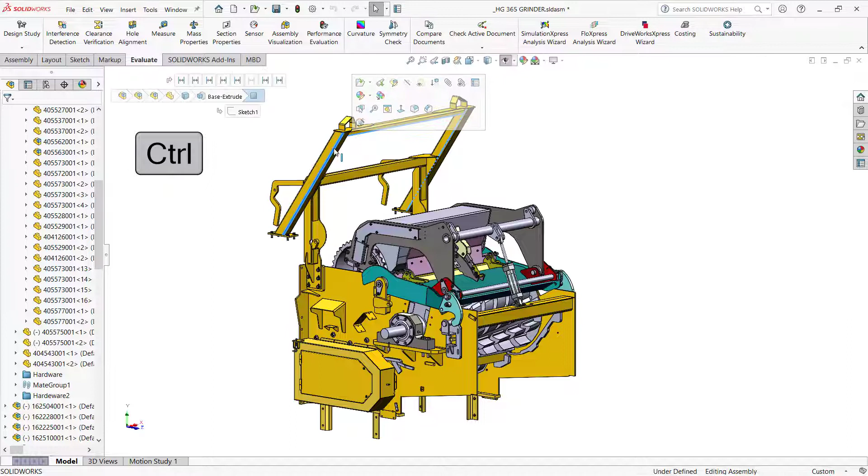But for SOLIDWORKS in general, when you're just working around and clicking on things, and yeah, you can do control clicks as well, but again, it's going to be edges and faces and things like that. So I actually prefer, if I'm going to individually pick a number of components, I'll use the right to left crossing selection, and I'll just do a quick little cross like that, and I'll hold the control key and select another item and select another item.

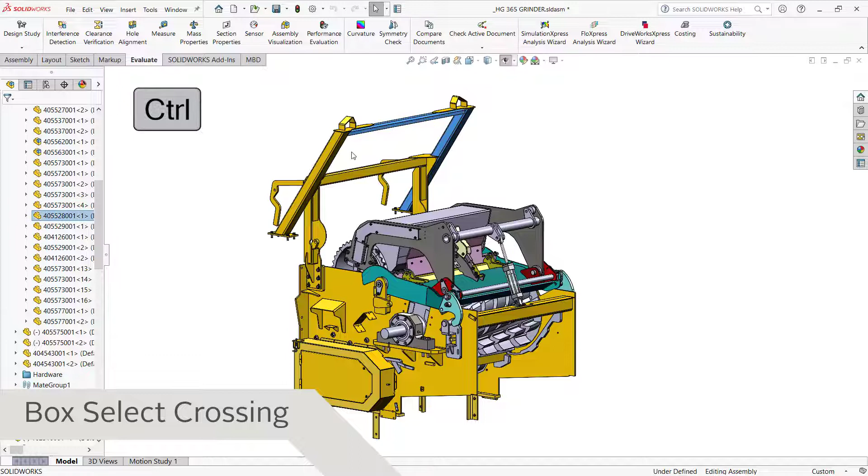And I kind of use that as my way to actually select the components, because in SOLIDWORKS, when you're doing an area select, like a box, whether you're doing everything inside or everything crossing, it is selecting at the component level. So I like to just do a little bit of a crossing select instead of a direct click on faces or edges. That way I know I'm getting the component selected that I want.

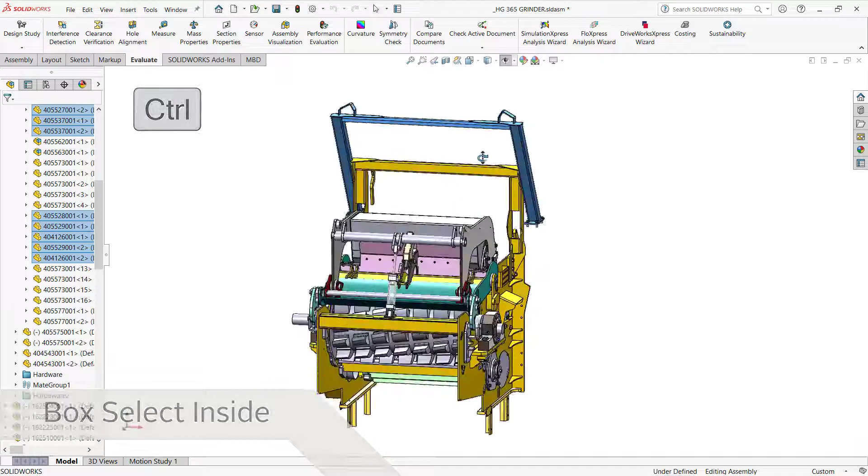Of course, typically people use crossing select in a box like this for getting a bunch of items like that. And then you can also go from left to right, the normal type of thing, to get everything that's inside of the box. I'm going to hold my control key as I do this, so we can see that we've grabbed a number of different components very quickly here.

Now, when I right click, I have a number of different items that I can use to act upon these components. I have the component menu itself, and one of those things is save selection. So I can make a selection set of components just like I can do a selection set of items inside of a part. So I'm going to save this as a new selection set. Again, I'll click on the white background to drop that selection. And then you can see here I have this selection set saved in my assembly, and give it a name.

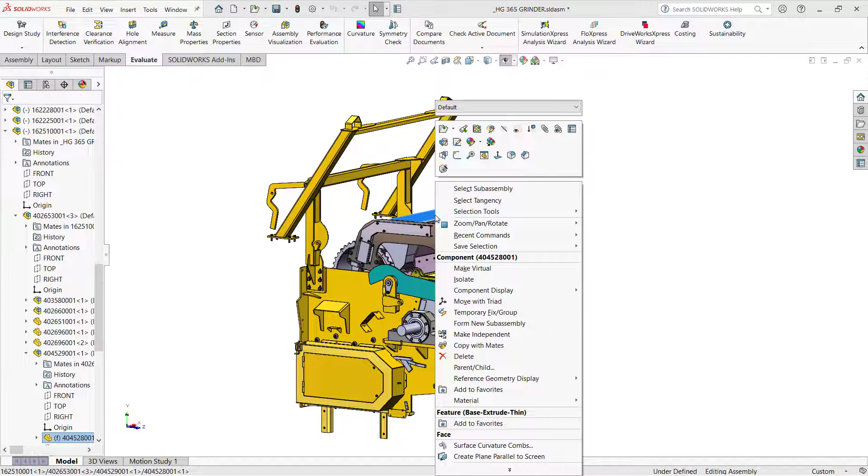And I can then recall it anytime I want to. If I hover over something in my assembly and right click, I have some things I can do as well. So I can select subassembly, for example. If I select subassembly, now this box could use a little bit of a UI bump in my opinion here. It should automatically, in my opinion, size correctly here.

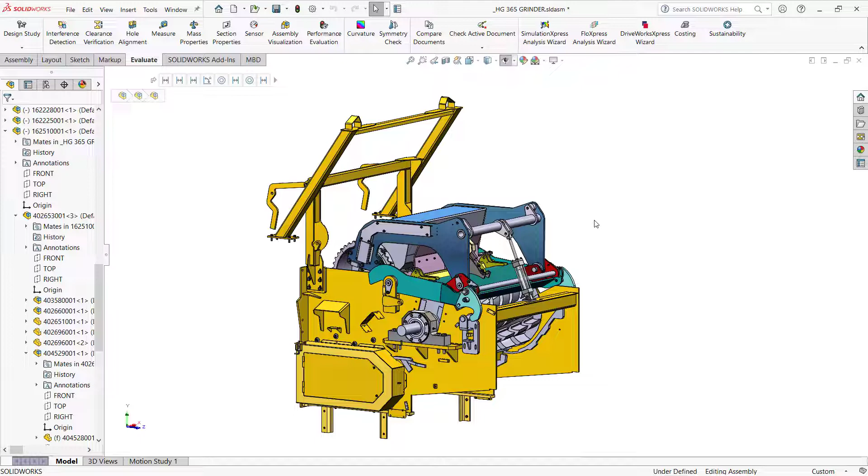But it's going to select the 3 subassembly levels I could choose from based on the face of the part that I right clicked on. So if I want to choose this level of subassembly, click on it. Now that level of subassembly is selected. I'm going to use the isolate command a couple times during this video here to kind of just drive home what we have selected. So that's that subassembly that we chose there.

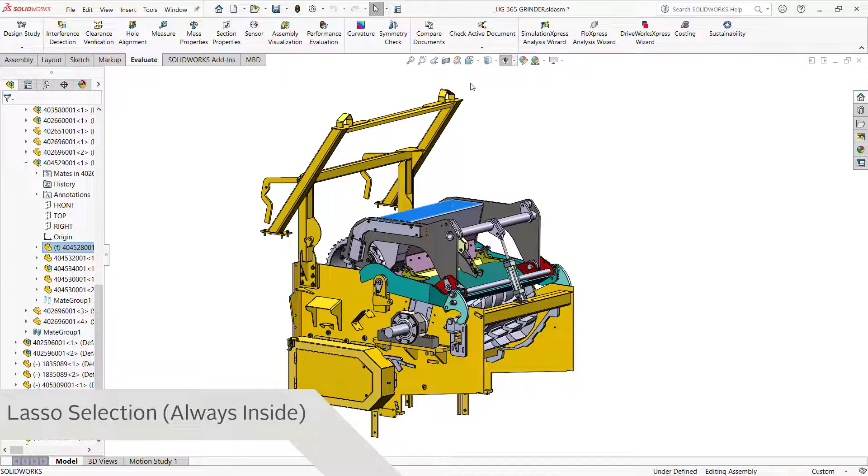Other things I can do is I can use the selection tools to switch from box to lasso selection. So I can go ahead and do a lasso. Now, in assemblies, it doesn't matter which direction you go. So if I go starting and go clockwise like this, I'll get everything that's inside of that loop. If I do a counterclockwise start selection there, I'll still get only everything that's inside of that loop. So crossing select in assemblies is only for the box, not for the lasso.

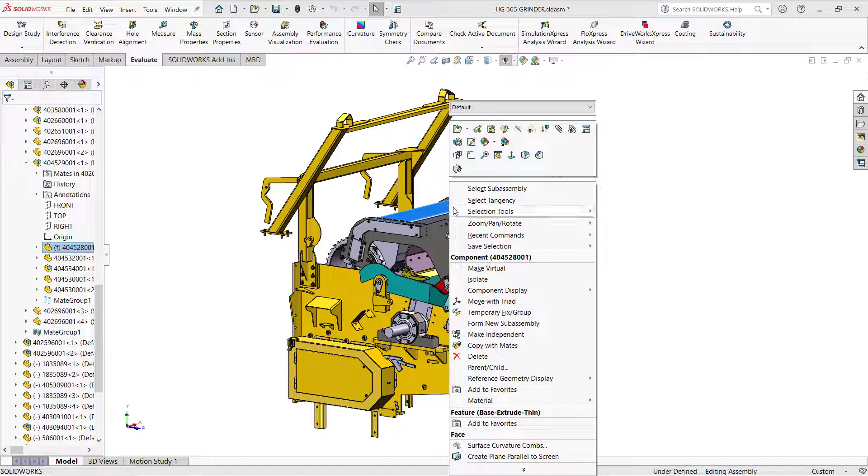Now, as I select things again, one thing I can do is I can invert selection. So if I do that right here, it's going to select everything except for the part that I've right-clicked on, like so. And if I click in the background without anything being pre-selected, I have the same kind of pop-up menu for selection tools that we have in parts. So I can switch back to box if I want to here.

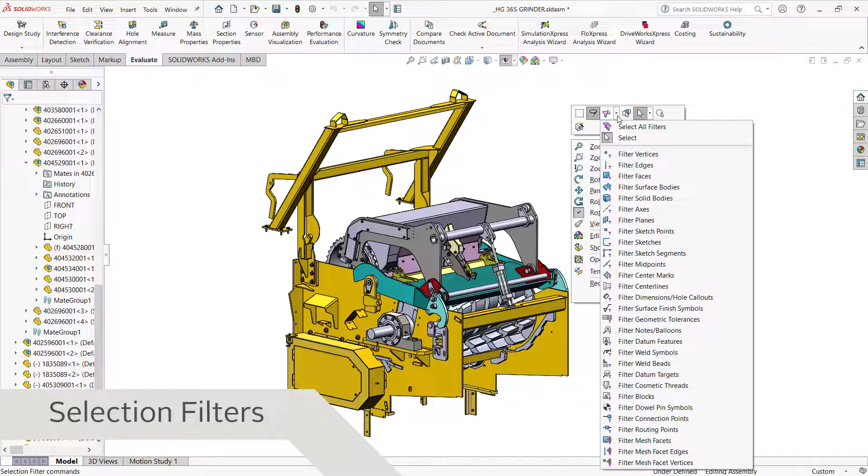I can also, if I like to, use selection filters. Now, one of the first things people ask me about is, where's the selection filter for components? There isn't one. That's a great enhancement that I know people have been asking for a while. I would encourage you to request that just to make it more consistent. But yeah, if you want to filter faces specifically, for example, you can certainly do that here if you'd like. I find that, again, I typically just use the crossing selection to make my component selections. I don't really use this much in assemblies.

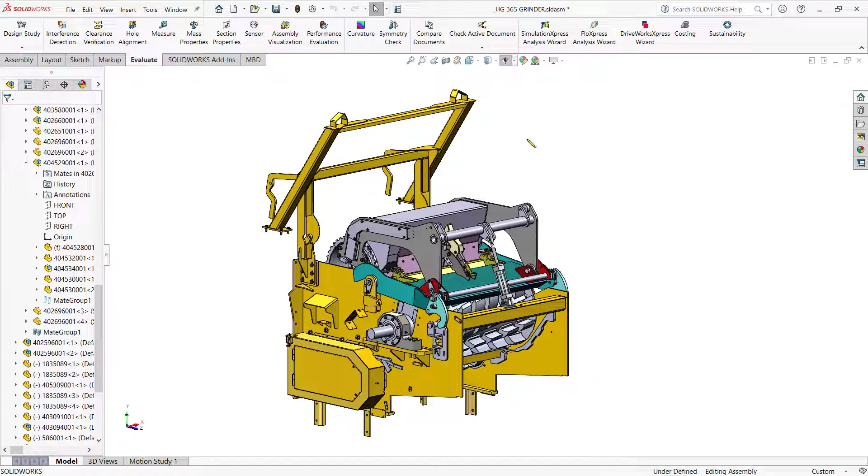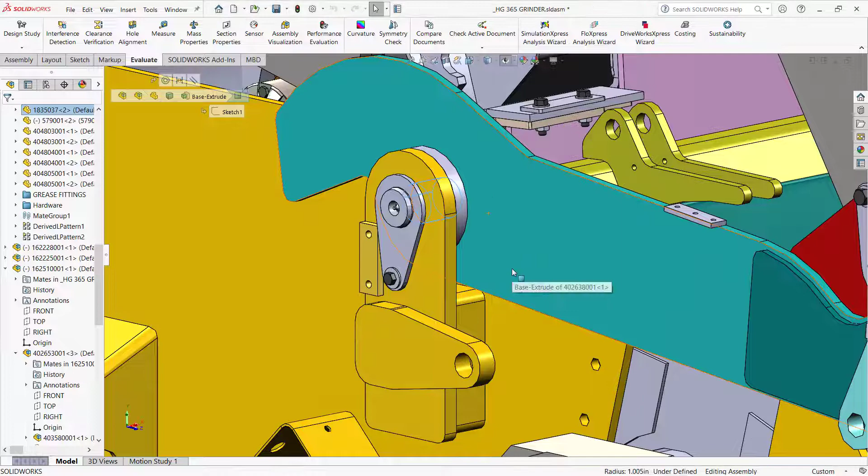Now, one thing you will find that you can do in assemblies, just like in parts, if I'm zoomed in close here and I want to do a select other, you can go ahead and just click and you can find the select other option here. And it'll be presented. Again, we're not presented with component level things, we're presented with clickable faces or edges. In this case, they're all faces. And go ahead and drill down behind there and select the component back behind there. Again, I'm really selecting the face of that component technically, but it will act as a component selection if I choose to do a component level operation on it.

I hope you've learned some new aspect of SOLIDWORKS selection that'll help you in your next project.